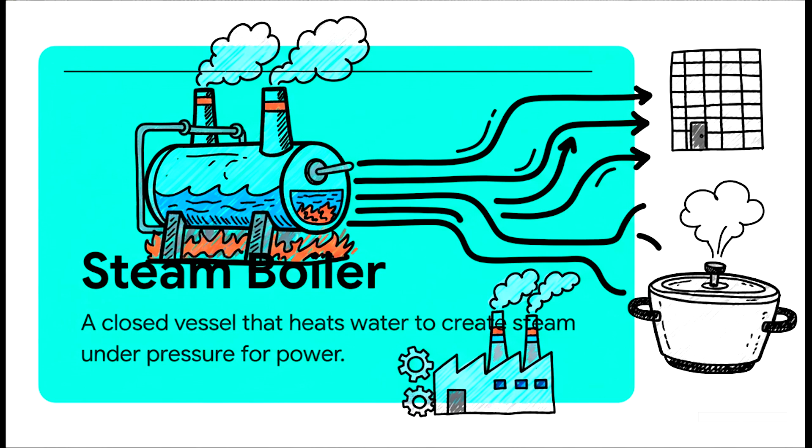Well, the secret is turning that water into something way, way more powerful, high-pressure steam. And the machine that pulls off that magic trick, that's the steam boiler. So what is it exactly? At its heart, a steam boiler is basically a super strong sealed container. You heat water inside it, and it creates steam under insane amounts of pressure. Honestly, the best way to think about it is like a super-powered, industrial-sized pressure cooker, but instead of making dinner, it's making the power that runs everything from factories to the electrical grid.

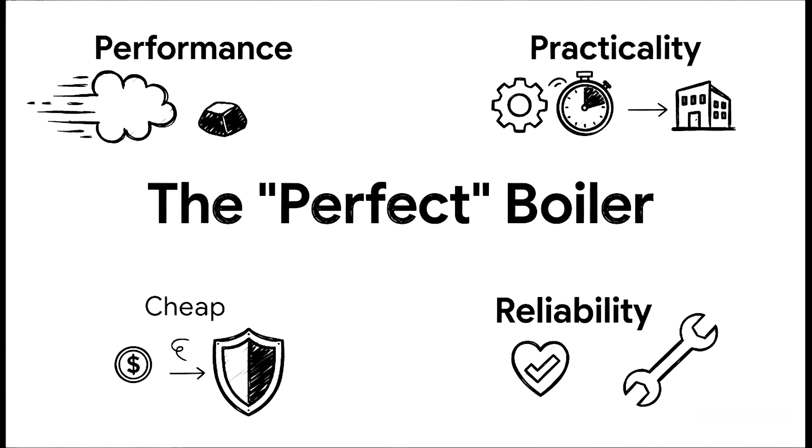Now, you can't just build any old giant kettle and call it a day. Oh no. Engineers have a very specific vision when they design a boiler. They're basically chasing this dream of a perfect machine, one that has to meet a whole laundry list of really tough demands. And here's that wish list. You want the most steam possible for the least amount of fuel. Total efficiency. You also want it to be simple to build, cheap, and fire up really fast. And of course, it absolutely has to be incredibly strong, totally safe, and easy to fix.

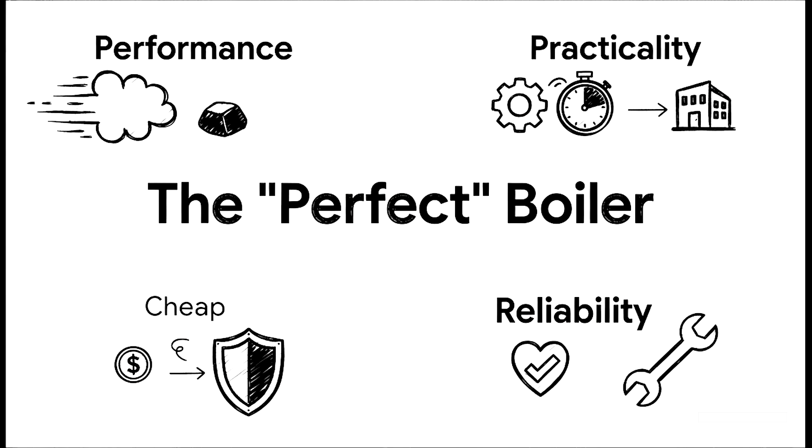But here's the catch. You can't have it all. These things often fight against each other, which forces engineers to make a really big decision right from the get-go. And that decision brings us to this huge fork in the road in boiler design. It's a single choice that splits pretty much all boilers into two totally different families. And it all boils down to one very simple question. Where does the fire go?

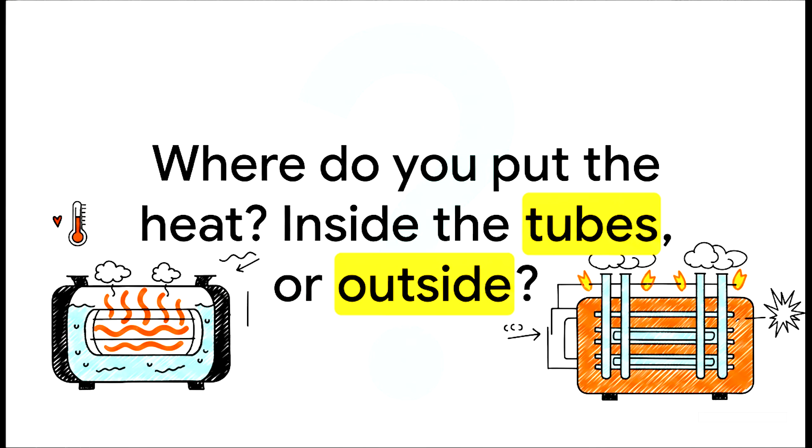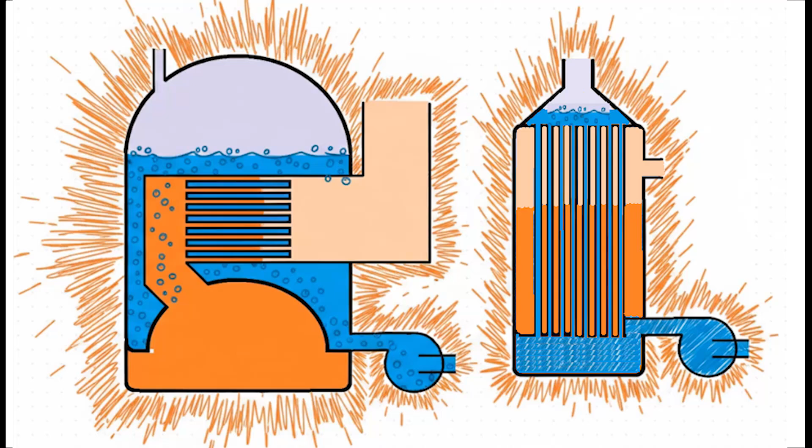Do you run all the super hot gases through a bunch of tubes that are sitting in water? Or do you do the opposite and run the water through tubes that are surrounded by the fire? It sounds like a small detail, right? But that one decision changes literally everything about how the boiler works, what it costs, and how safe it is. And this right here shows you exactly what I'm talking about. On the left, you've got the fire in the tubes approach. See how those hot gases snake through pipes that are completely submerged in water? Now look at the right. It's the total opposite. The water is inside the tubes, and the fire is raging on the outside.

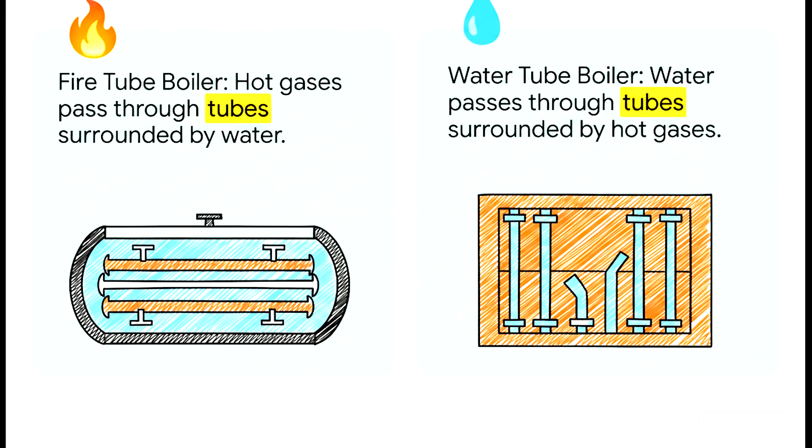Okay, so you gotta lock in these two names. They're the key to everything. When the fire is in the tubes, we call it a fire tube boiler. And when the water is in the tubes, it's a water tube boiler. Simple as that. This one distinction is what we're gonna unpack. All right, so what does this all mean in the real world? What are the actual consequences of that one design choice? Let's put these two boiler types head to head and see how they really compare.

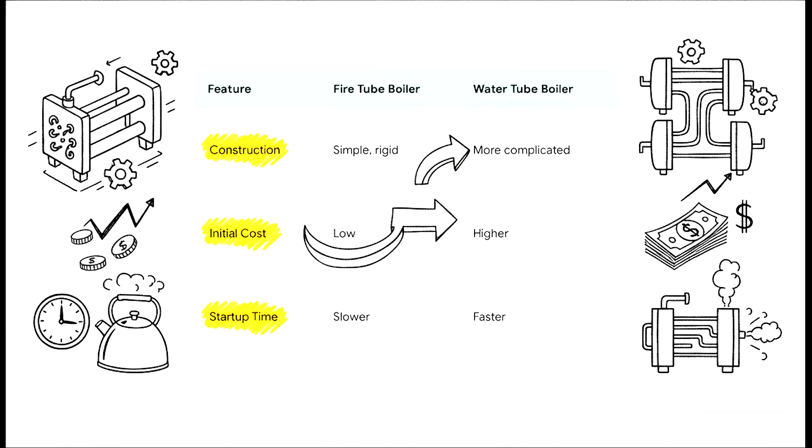First up, let's talk about cost and just how simple they are. The fire tube boiler, because it's basically a big tank with pipes in it, is way simpler and more rigid in its construction. That makes it cheaper to build, which is awesome for smaller businesses. But all that water in the tank takes forever to heat up. The water tube boiler, on the other hand, is more complex, so it costs more upfront. But because there's much less water in the system at any one time, it can get up to pressure way, way faster. Now, what about raw power and size?

Well, that big shell on a fire tube boiler just can't handle super high pressures, so its power is limited. But that giant reservoir of hot water is a huge advantage. It means it can handle sudden demands for steam like a champ. Think about a factory where machines are turning on and off all the time. But the water tube boiler, that's the undisputed king of scale. It's built for unbelievably high pressures, for the gigawatt-scale power plants that form the backbone of our entire electrical grid.

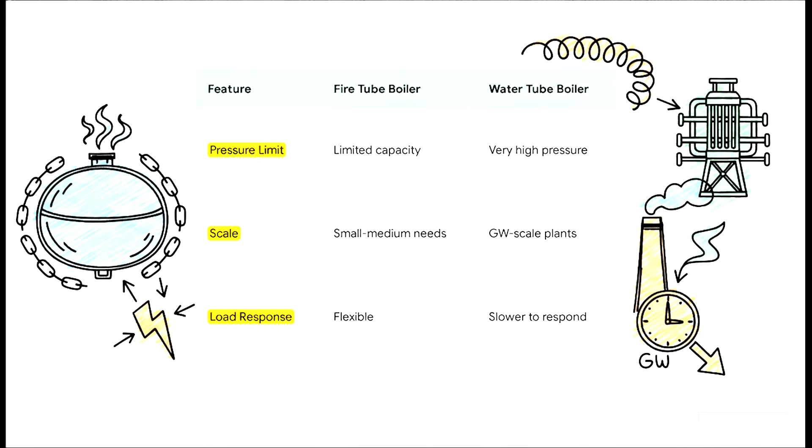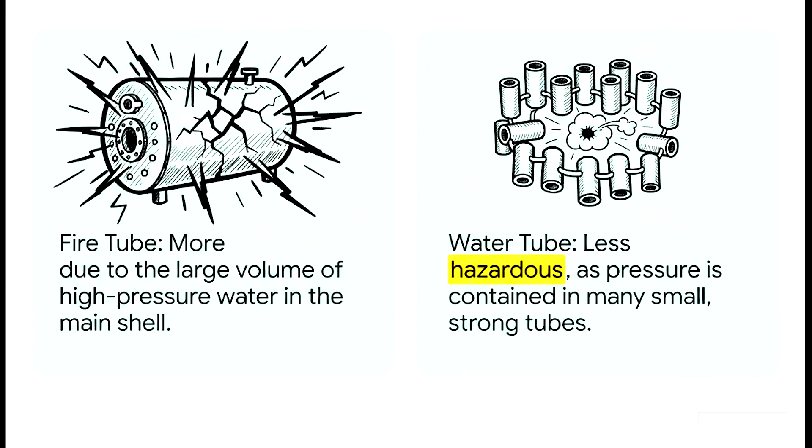And then we have to talk about safety. This is a big one. A fire tube boiler holds a massive volume of explosive, high-pressure water in one single container. If that shell fails, you're talking about a catastrophic explosion. A water tube boiler, though, it's smarter. It spreads that high-pressure water out across hundreds of smaller, stronger